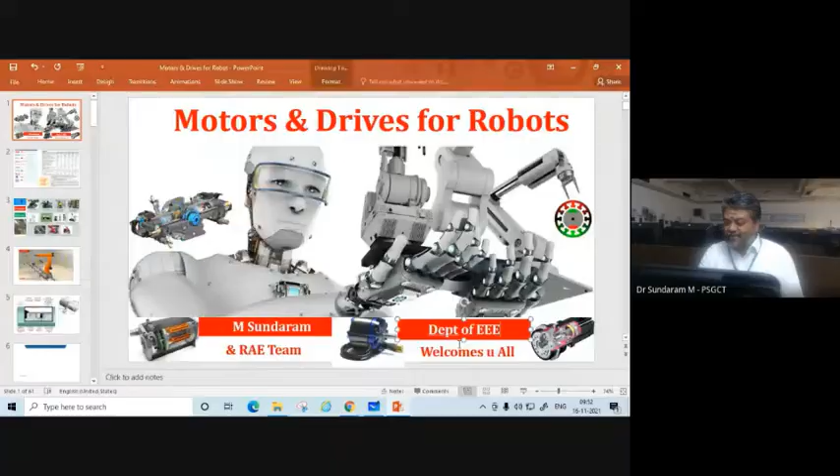Back to presentation. Here you can see, I want to show some integrated motors in the beginning itself. You can see your motor is rotating, but your action is to and fro. There are some automation systems where people are doing this kind of actions.

And some more planetary gear mechanism, harmonic drives, which is heart of robots nowadays. It will look like this, where you can see the motor shaft is attached to the center part. Then on the outside, there are more gears through which a load is going to connect. So you can call this geared motors, but apart from that, it is called harmonic gears.

Why is it harmonics? As an electrical engineer, you are aware harmonics means a mixture of more things with a fundamental 50 Hz. Similarly, the center shaft, with that, you have more number of gears. That's why it is called planetary or harmonic drives. Those things we will discuss, right?

So when you want to start to understand something before delivering to the student, first you find out the top 10 companies in the world who is making that particular content. In our case, this motor. So the top 10 manufacturers in motors are ABB, Yaskawa, Kuka, Kawasaki, Epson, like this.

Why should we go to that? Because what we are teaching should be lined up with the industry where our graduates are going to look. Then only the bridge between industry and academia will be very close. That's the reason, right? So it is basically a learn-how-to-learn concept.

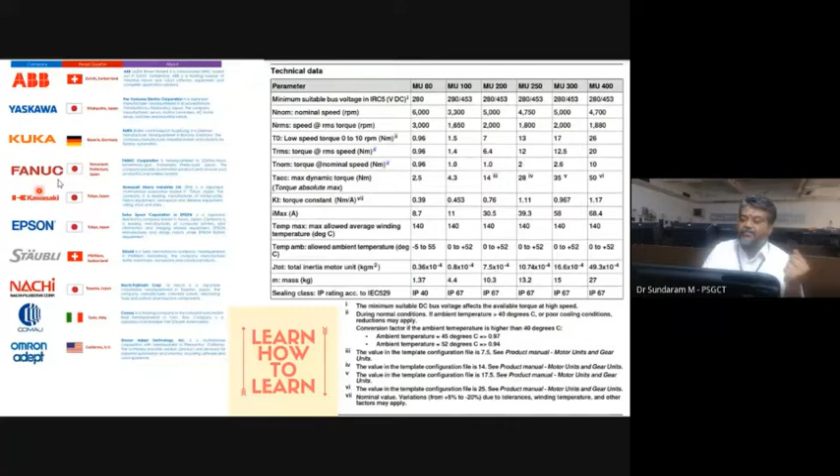Similarly, some class, IP class, all those things, right? So you can go through some kind of datasheet so that you can see some things. So here you can see, right?

See, all the motors in all applications serve only two purposes. One is called position, another is called velocity. So which we have to learn from nature.

See that tiny hair, how it catches that meat. Very interestingly, how it positions itself. You can imagine which control system acts this. PID control, PWM control, space vector PWM, right? Encoder, all those things. So basically it is for position and velocity.

So if you see the applications in robots, it starts from medical mobility, all-terrain mobility, AGVs, then you have AMR, autonomous mobile robots, coming up in a big way. Then industrial robots, robot mowers, agriculture robots, coming in another big way of potential. Surgical robots is another thing. I will share some of our experience with this.

Then inspection robots, then we know everybody talking about EV, definitely it will be a bandwidth for a maximum of 20 years. After that, biofuel will come, because ethanol is going to be a biofuel. So definitely in two decades, because Brazil is the one country having 90% ethanol as fuel, right?

So we should move towards that. That's why the central government is pushing ethanol mixing. Lot of work is going on, but unfortunately because of media and politics, we are not able to look into that or hear into that. See, you should visit some websites to understand why we should understand that, right?

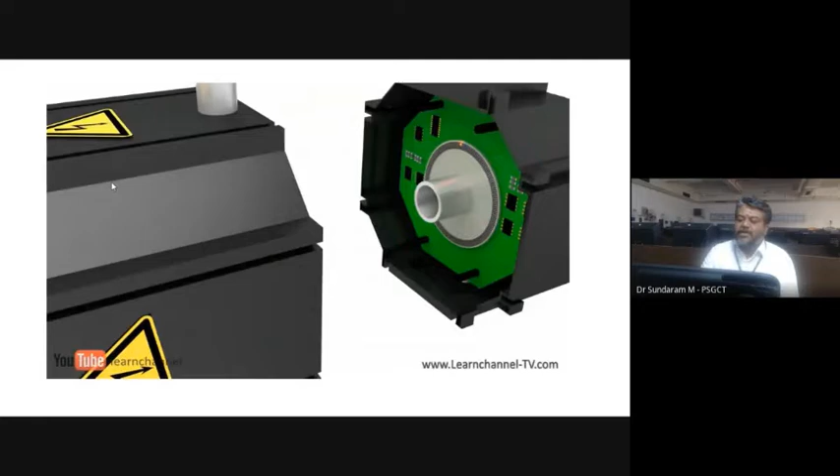So you take a basic servo motor. In a servo motor, you have an encoder on the back side. You can see the encoder is revolving. And if you look, a three-phase supply is connected through your CNC system. The encoder is also fed back to your drive. And this is how the machine rotates, the servo motor control system.

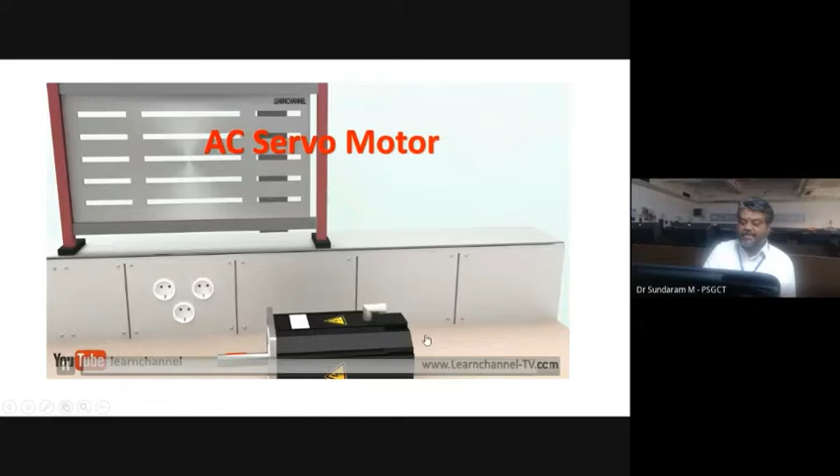Right? So it is basically a PMSM, permanent magnet synchronous motor. So this machine is going to give feedback to the controller. Accordingly, the controller will generate the control signals and it's going to operate like this.

So here you can notice how in a CNC lathe acceleration and deceleration matters. How fast your machines get accelerated and decelerated, how fast it's changing the direction. That's why I said you have to calculate inertia and all other things. Right? So this is another application.

So maybe all this positioning we are basically doing with your PID controller, but more than that, you can see the linear motors with a resolution of nanometers. You imagine what nanometer resolution is going to be. So here the linear motors are moving with this kind of mechanism.

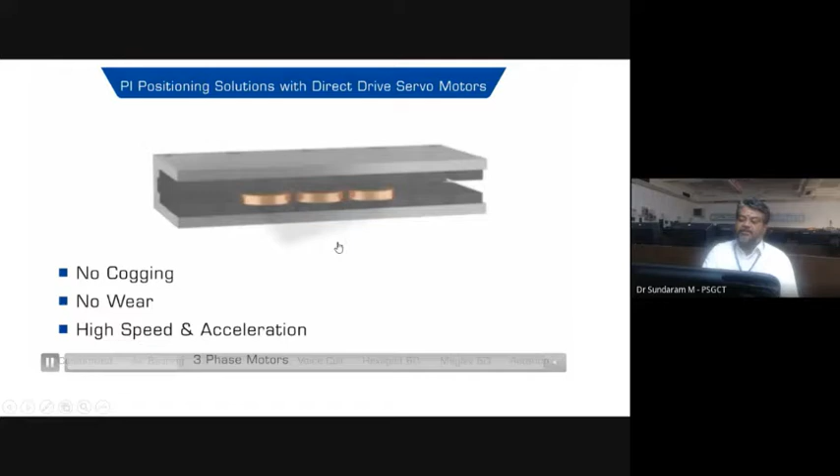So you have a stator on both the top and bottom. Then you have a rotating rotor or moving secondary. Here the secondary is moving, the primary is excited. So a lot of linear mechanisms are used. Here the travel distance itself is 20 mm, right?

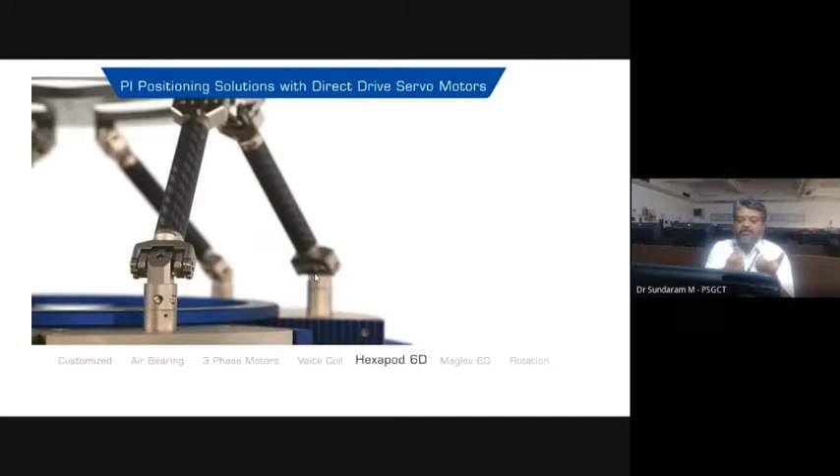But a lot of vibration mechanisms people are using in automation. When you want to position the washer, sample, screws, all those things, they will do this. This is another hexapod with a 200 Hz frequency of vibration, 250 nanometer. This is another automated application, where you can see non-contact movement.

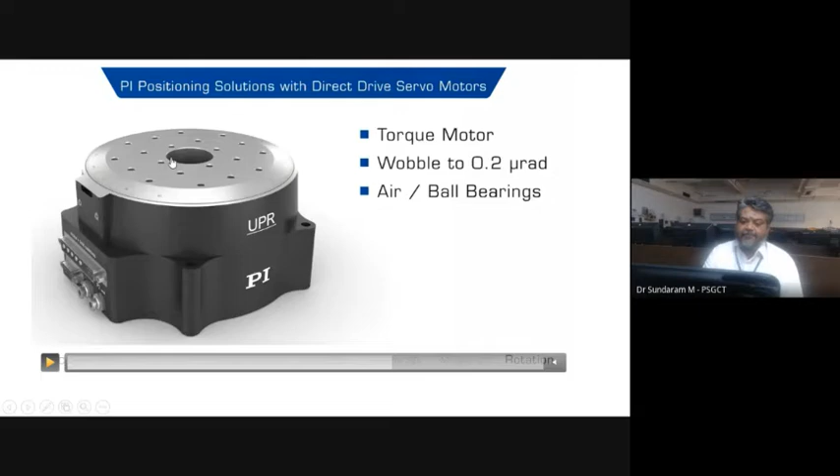And this is another rotating table, which is called a torque motor. Here you cannot see it as a motor itself, right? It is called direct drive. So there is no belt, no gearbox. The moving member itself is going to act as a rotor. That is most important. Right?

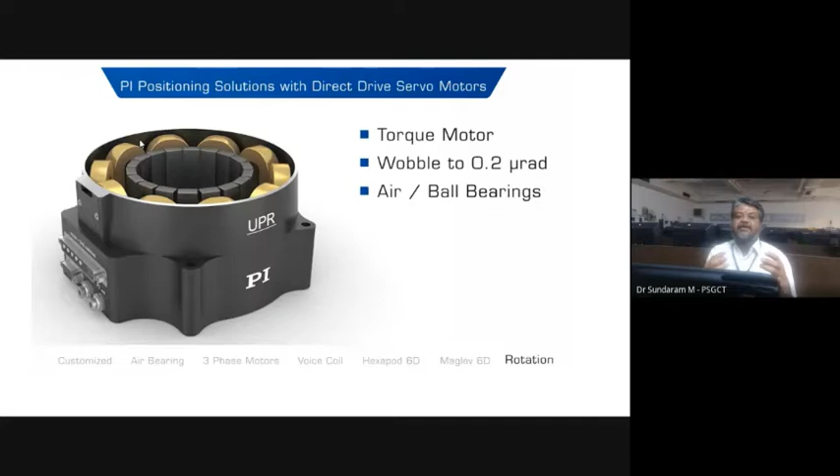These are a few applications, but inside, if you see, it is a coil with a permanent magnet rotor. So everywhere we are going to use either Lorentz force or reluctance force. So how to create Lorentz force or reluctance force? Basically, we need a coil and a magnetic part, or you can say an electric circuit and a magnetic circuit. When a current carrying conductor is kept in a magnetic field, it will experience a force.

If I give that and you keep it in your mind, then you can understand from the data. See, tangential force, radial force, axial force, everything will be determined by the dimensions of your shaft, either diameter or center distance, or how much distance with respect to your core, that means your center part, or from the shaft height, all these things, right?

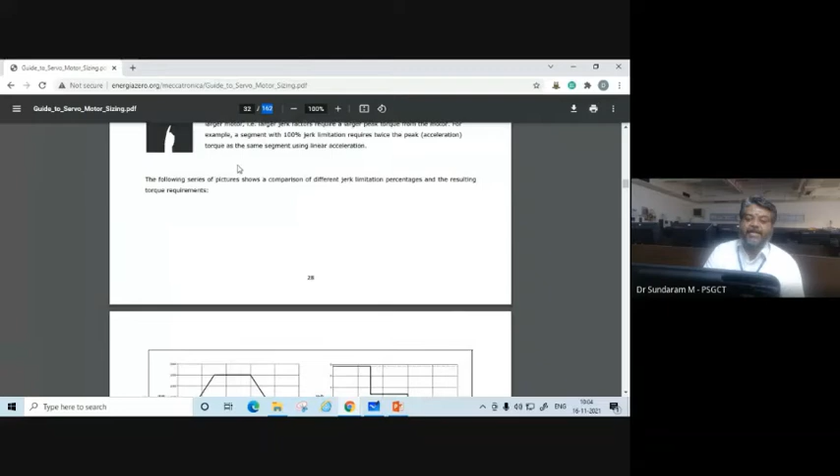And suppose you use the Oriental Motor sizing tool. People in industry mostly use this online tool, right? With an online tool you cannot understand what is what, but it will give applications like this. Say, ball screw load. Your application may be of this nature, or it may be an AGV like this, where you want to develop a motor for an AGV. I will take this example because it is closely related to your program right now. So it is AGV. See, they will give what is what.

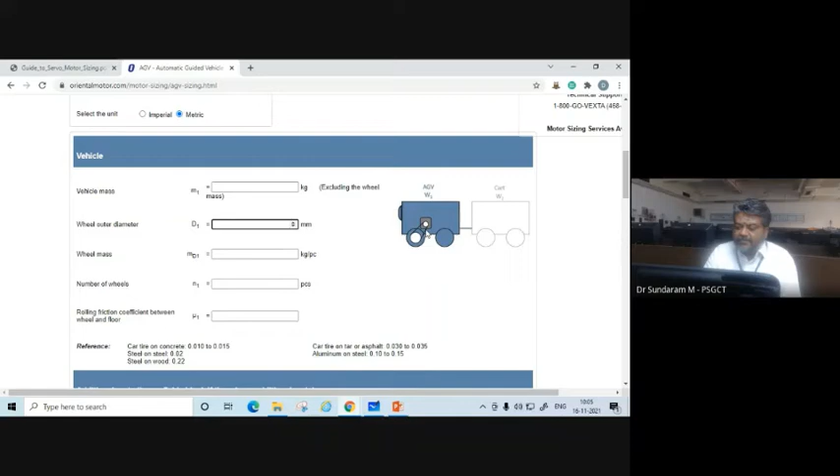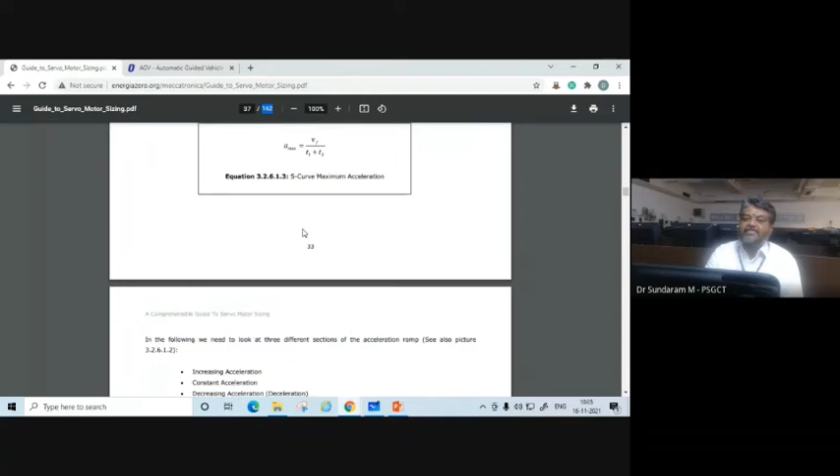Then you have to select either metric or imperial. Now you should put what the weight is. Suppose I change to metric, then it will be changed to kg. Then the outer diameter of the wheel, mass, number of wheels, rolling friction. You have to fill in all these data. Then if you click calculate, it will give the load torque with acceleration, deceleration, so the motor torque. Those formulas, that software, is developed basically from this selection guide. So please go through it. It gives the detailed calculation about acceleration, deceleration, mass, how to calculate the inertia for different profiles.

I want to show one more thing. Maybe some of you have seen it. Those who have seen it, please ignore it because you may get bored. But I want to start with all those things. I don't want to miss anything

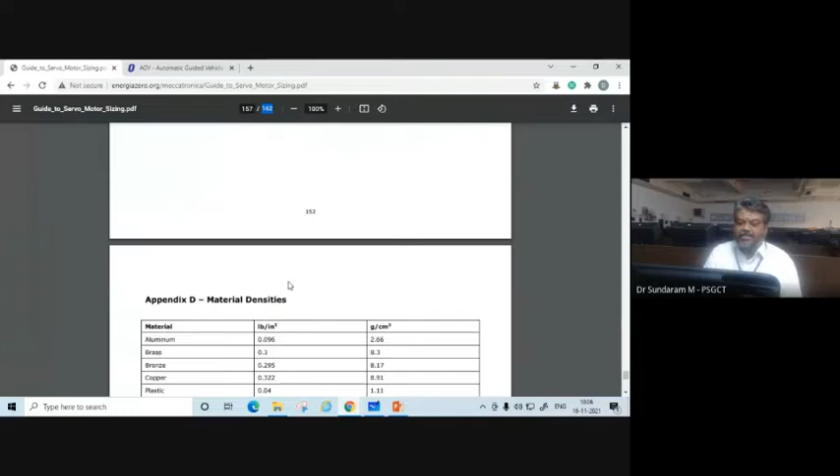for freshers. If you see the index, they have even given some material properties. If you take aluminum, what is the density of the material, in the appendix. And if you connect a screw, ball screw, what is the efficiency? All the details are given. What is the friction coefficient when you use brass on steel, plastic on steel, ball bushing bearing, linear bearing, all the information is given here. So it is a Bible. You should definitely go through it.

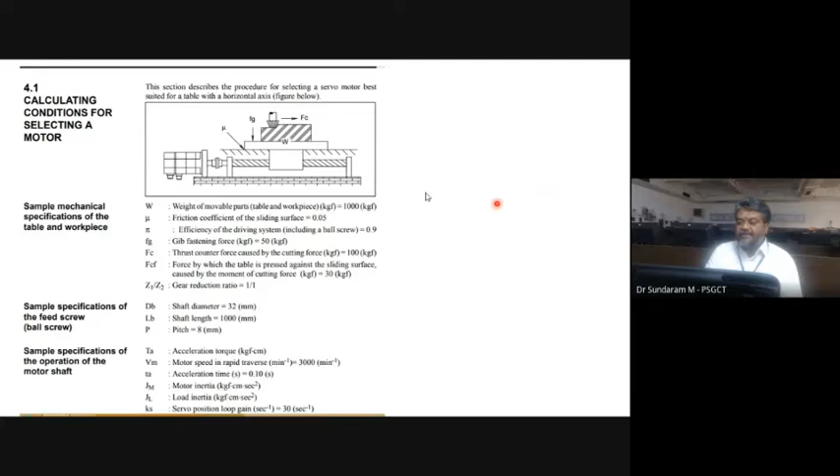If you come back to this presentation, you can notice: if you take a lathe, here the parameter mu is given. So how to know mu? You have to look at the data sheet, right? What would the friction be? In this example, weight is given, friction coefficient is given, efficiency of the driving system, which I have shown in the appendix, ball screw or belt or gear, whatever it is, then the equivalent efficiency. It is a data sheet.

Like the mechanical design data handbook, we should have an electrical design handbook like this. Somebody interested in writing a book can try. So it is about this. All the details are given. I don't want to read those things, but you can do the calculation.

Why I am showing this is, if you want to select a motor for any robot or lathe or crane or elevator, AGV, electric vehicle, first you should calculate the load torque. To calculate the load torque, you should know the system. In the system, you understand what mechanical objects are being used, starting from friction or any gearbox, overall efficiency of the individual system, mass, inertia, everything. So this is step number 1.

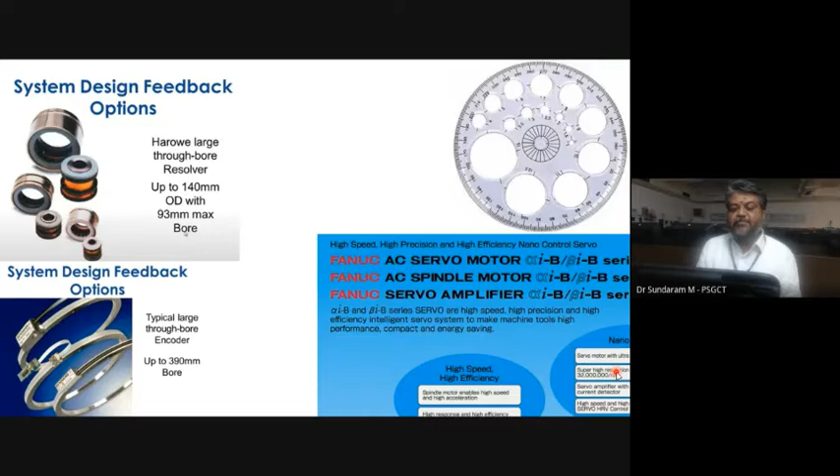Then we have to choose a feedback mechanism in robots and automation. You can notice here, for system feedback people are giving a resolver. We know encoder, rotary encoder, absolute encoder, but one more is called a resolver. If you take a Fanuc servo motor used in CNC machines, you can see high resolution, meaning how many pulses are produced per revolution. Can anyone read this and tell? It is 10, 100, 1000, 10,000, lakh, and 32 lakh pulses per revolution. Imagine how to produce that many pulses in one revolution.

These 32 lakh pulses per revolution are going to connect to the high speed input of the DSP processor. That's why in a DSP processor you have two inputs. One is normal digital input, which can buffer the data at normal frequency. The other is high speed input, where data appears at a faster rate. If you convert these 32 lakh pulses per minute, you can divide by 60, right?

Then you will get clocks per second, nothing but frequency. So it will be in megahertz. At a megahertz scan rate, the pulses being observed from the encoder into your processor thereby control the positioning. That's why in robot or nanometer positioning, you imagine, right? You know 1 mm. That's why I'm showing this protractor.

See, on a protractor, 1 degree you can mark. If you're asked to put 0.00001 degree, can you mark it? It's very tough, I hope you all will agree. So 1 degree, 360 markings. But if you're going for 32 lakh markings in 360 degrees, imagine how very close they are, but it should be detected by your sensor. That's another most important one.

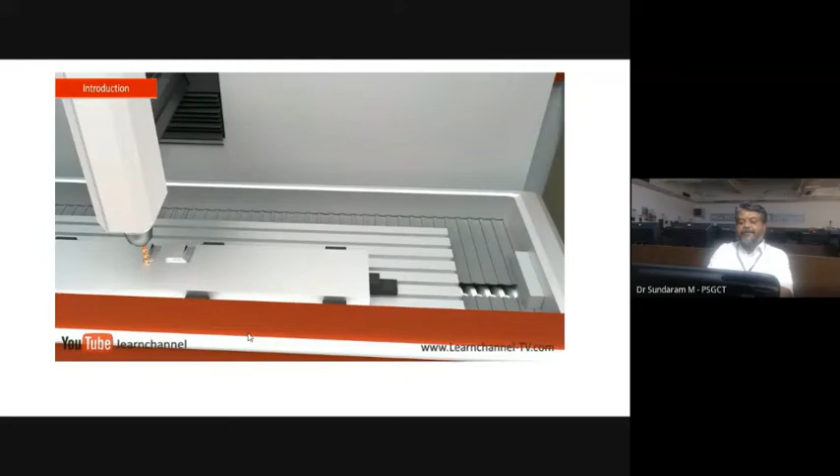So this is another one where you are... so why do we need micron positioning? You can see nowadays machines are used for manufacturing, not only for drilling, also to shape the rocket. So the resolver is placed here. So how does the resolver work? The resolver is basically an electromechanical device.

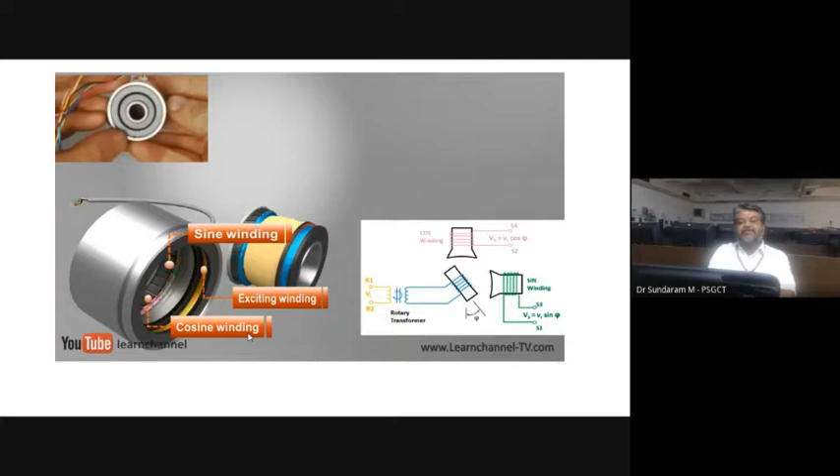It has a stator input and two small windings inside, one is the sine winding, another is the cos winding. And when you rotate the shaft, both windings generate sine and cos waveforms. Once the sine and cos waveforms are given to your ADC, inside the ADC you can divide the sine waveform by your clock. You know clocks are in gigahertz in our DSP processor, right? So using the DSP processor, the clock is used to divide the sinusoidal EMF generated by this.

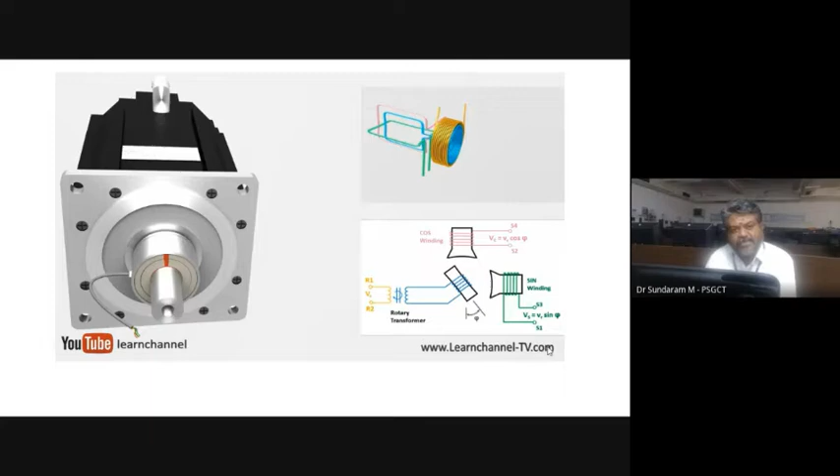See why people go with this advantage: making an encoder disk, what we have seen earlier, is very tough. You cannot put grating, right?

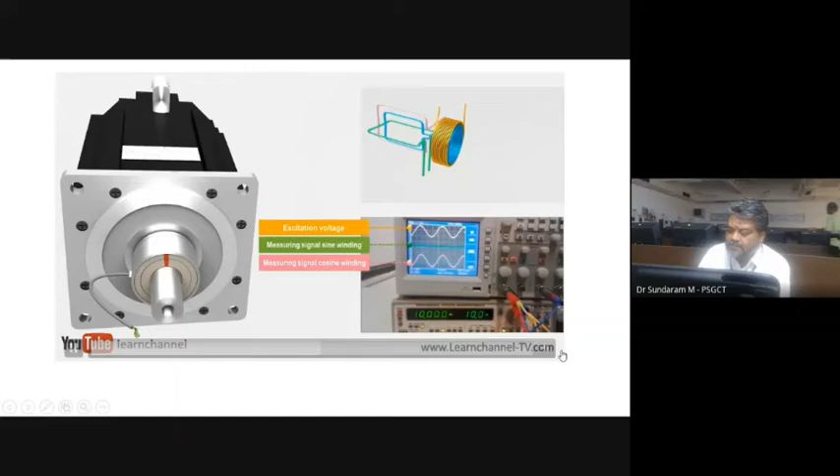So that was mentioned in this. Here you can see. When the RPM increases, the frequency of the signal also increases. It's now running at around 2200 RPM. One winding is excited and two windings have induced voltage. So a high frequency rotating transformer is used. Going with this kind of device, the price is very high.

Right. So now let us understand where motors and drives are used in robots. Application. So far, quickly we came out with the top 10 manufacturers. You should know about the data sheet, what technical parameters they use, where it is being used. To size a motor, you should understand the field requirement: weight of the object, the degree, the transmission mechanism, what kind of gear, what kind of belt and its efficiency. Then feedback mechanism, mostly resolver is used here. Then where it's being used.

If you take your robot, vertical motion, what do you mean by vertical motion? Moving up and down. Why should I understand roll motion, pitch motion, vertical motion? Then only you can understand how long this motor is going to operate. What is the duty cycle? Or is this motor going to operate only 5 minutes in a day? Pitch motion is short duty. But vertical, radial and rotation motion share equally. Yaw, pitch, all those operate then and there.

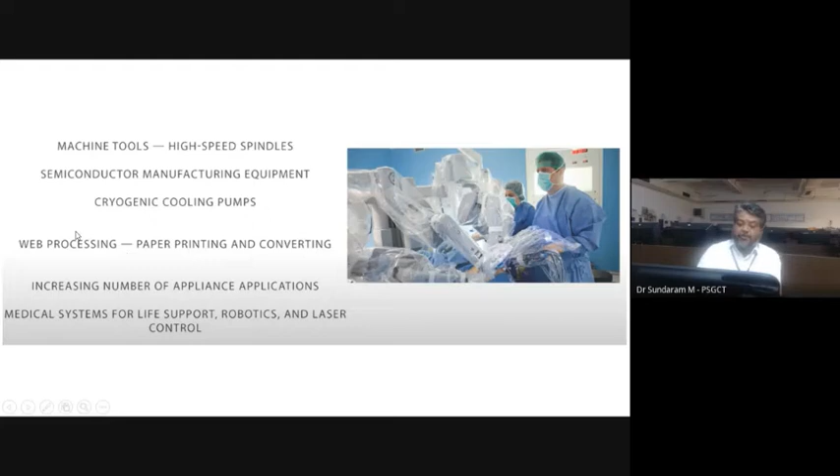So again, the same application. I think already we discussed why we need a direct drive. Since the belt occupies space and needs transmission efficiency, we want to overcome all those things. So here you can see high-speed spindles are used in machine tools, semiconductor manufacturing equipment, cryogenic cooling pumps used in satellites, and even paper printing and converting in web processing. Several applications like medical systems, robots, everywhere we want to use this.

And if you see the motor being used, it's not the conventional mechanical motors. More than that, we need. Even in electric vehicles, people are using this. So different variety of motors. Here you can see all the motors used in robots and industrial applications. Some of them are direct drive, some of them are coupled drive. Now you can see one of the high density motors used in robots. This is the permanent magnet in the rotor. It's basically a servo motor, or you can call it a PMSM motor.

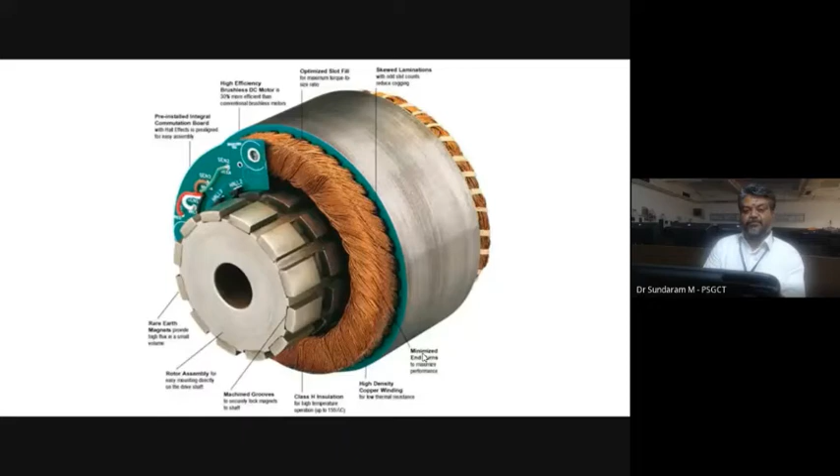But you see how the windings are wound using a machine to reduce the end connection. So compact, winding by hand is not at all possible. You can notice here the end turn is reduced drastically. The end turns on both sides of the stator core contribute nearly 20% of the resistance, 20% resistance which is not required. The conductor lying in the overhang portion doesn't contribute anything. The conductor lying in the core is going to experience the force. So we have to minimize that. And some sensor-integrated motors.

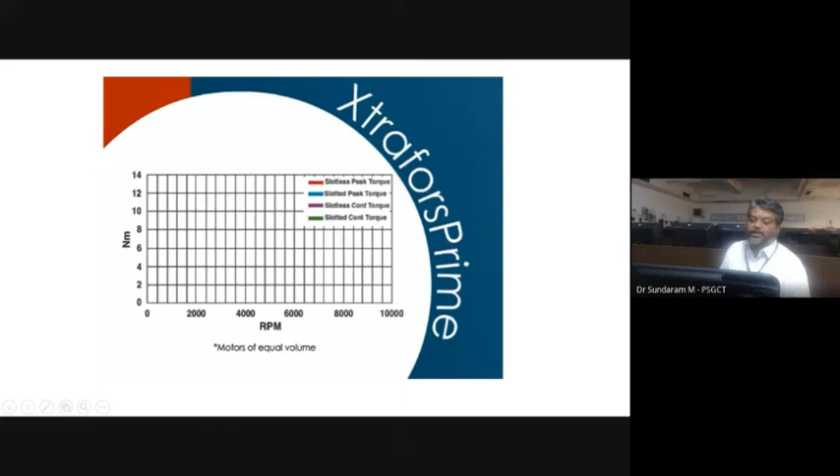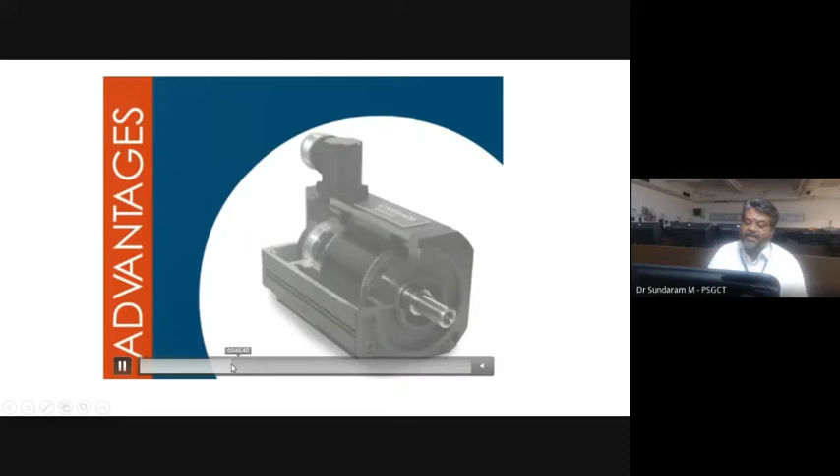It is a brushless servo motor. I just want to show how it is made, and a characteristic, to understand it. One axis is Newton meter and another is RPM. You can notice here, the red line indicates slotless peak torque. Blue indicates the slotted machine. The brinjal color is slotless continuous torque. And green is slotted machine continuous torque. So you can notice the slotless motor has the advantage; see how many times more it is.

See here. Why? We are not moving into slotless right now, but all the motor manufacturing companies abroad, particularly those who are making motors for robots, are going with slotless machines with the material. Now 3D printing is coming up. So if we are not catching up with the technology, we will be very much behind. So now you can have a look at that slotless machine.

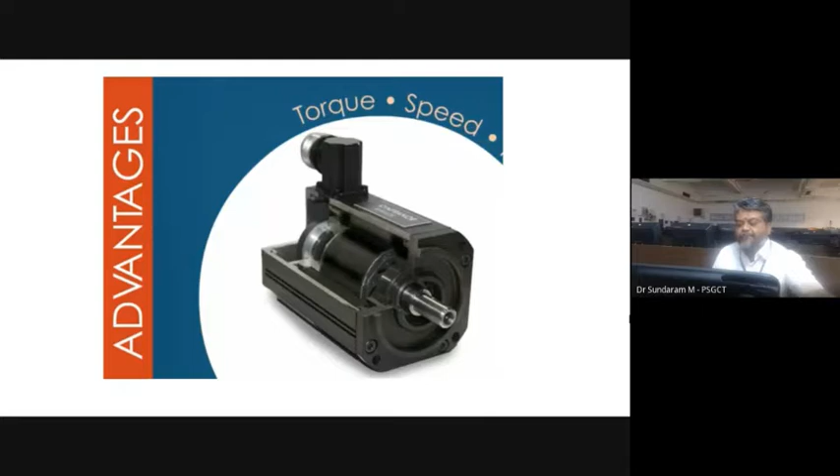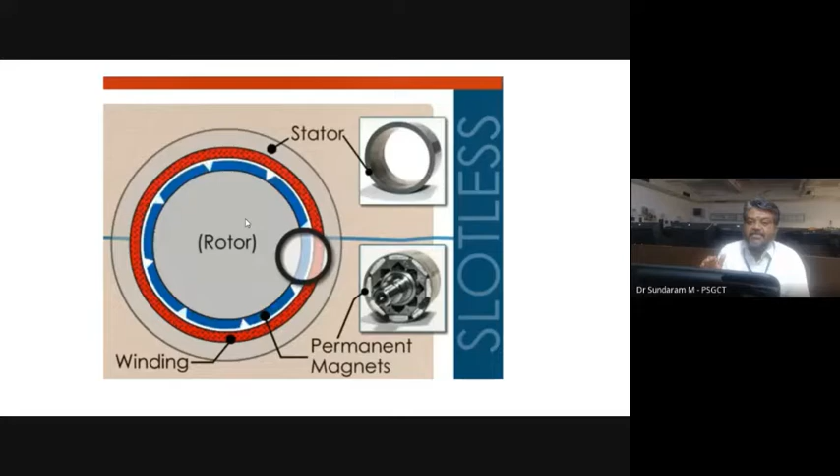Now you have a look here. It is a stator, there is no slot. Winding is placed inside, smooth cylindrical surface. So when you use this machine, then you will find less torque ripple. Because of the less torque ripple, you are getting good RMS torque, noiseless operation, vibrationless operation. So many advantages in this.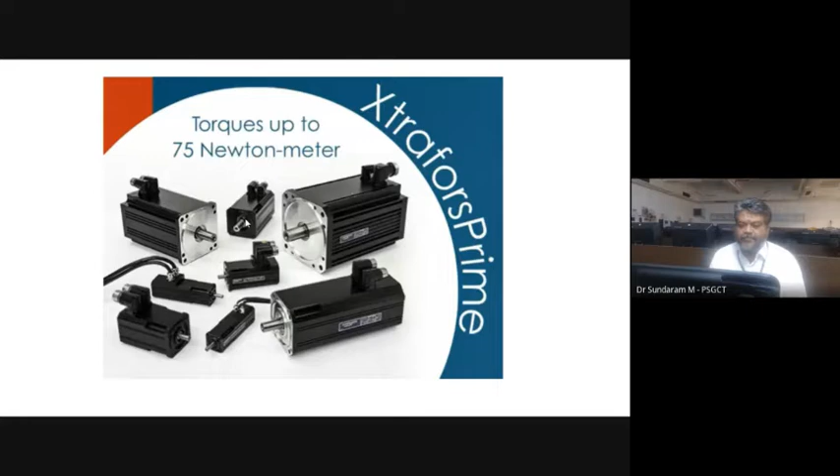So we should include all those things. Like, this is the company who is making this kind of motor. Frame size very strong, 38 to 190 mm. Most of the robot motors are smaller in size, but torque you can see 75 Nm. So in most of the assemblies, fabrication, metering technology, everywhere people are using this motor.

So now you can see, I just shortlisted the application. This is called Universal Robots. In Universal Robots, you cannot see the motor anywhere. It looks like a joint, that's all. But inside the joint, they are going to have a motor. So you cannot see the motor. That is the beauty in this. Motor is kept inside, but you cannot see it.

There is no space for placing a motor separately and connecting it through a gearbox, belt, or chain, whatever the transfer mechanism. There is no that. In a frameless motor, you can see this is your normal rotating magnet inside, stationary wound armature. So it looks like a concealed winding.

We know that in all the motors, the D squared L rule is used for the output coefficient, C0 D squared L. So diameter and length decide. But here, they are increasing both length and diameter because of the provision of frameless. So you can see the factors to be considered. For a low speed, high torque machine, choose a larger diameter. For a high speed machine, go for a lesser diameter.

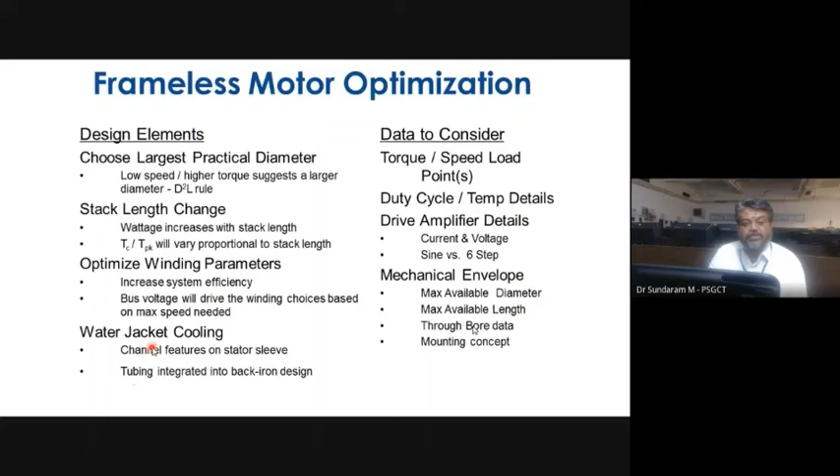Then if you increase the stack length, you will get a machine with a lesser diameter. Lesser diameter means πD is less. Peripheral velocity is going to be less. Centrifugal force is going to be less. So you can make your motor with less costly material. That is another advantage of going for less diameter and more length. And sometimes you are in a position to give cooling. All those things you can see.

This is another thing. Here you can see in robot motors, even the bearing is part of your shaft. If you want to dismantle, you cannot rewind all this; use and throw. That's why it is costly. The purpose I want to show is the closeness.

See here, the groove and the gap between this, you can see the gap per side, 0.1 mm or 0.05 mm. Imagine. Now we are making motors with an air gap of 0.5 mm. If we go to the Sahani group, they'll give an air gap of 0.5 mm, 0.6 mm. But you see the air gap here, 0.1 mm. Very, very thin. It means how close your rotor and stator are, and what the dynamic balancing capacity should be; only then will it be possible.

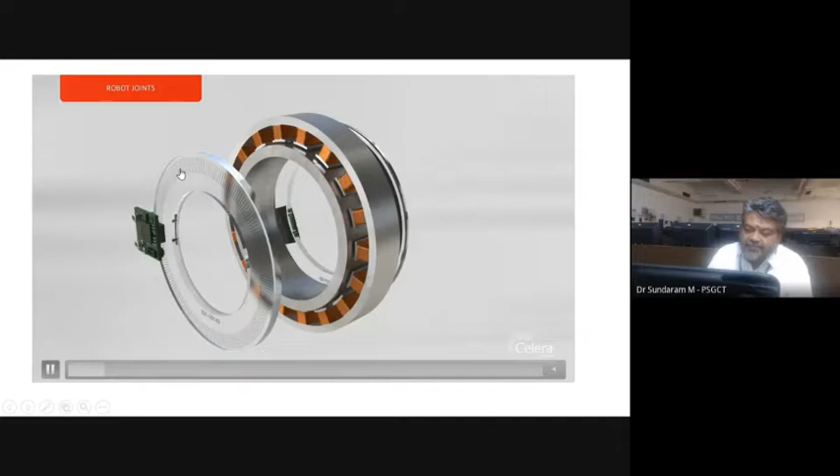And have a look at this. This is another company who is making robot joints. You can look into the winding, and this is an encoder disc for some motors. You can see small lines. It is a joint, that's all. It's a robot joint, which is called an integrated motor.

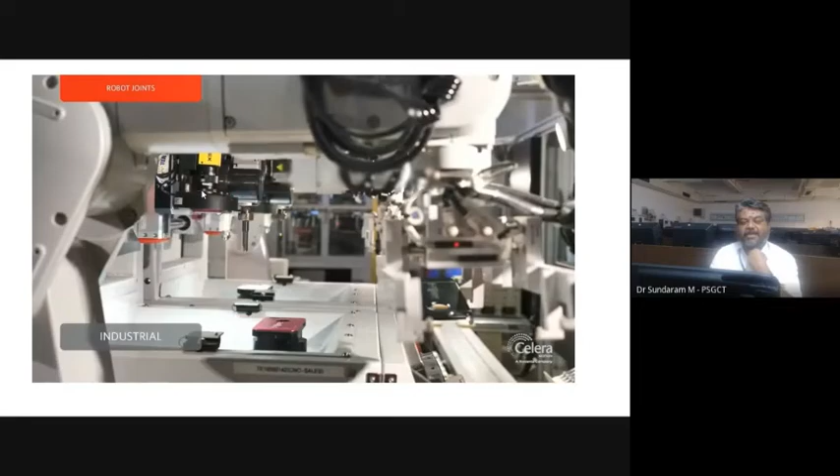Direct drive, integrated motor. But keep one thing in your mind: all are working with Lorentz force and reluctance force, which we talk about for conventional DC motors and induction motors. A current carrying conductor kept in a magnetic field will experience a force, or the rotor tends to align along the minimum reluctance point.

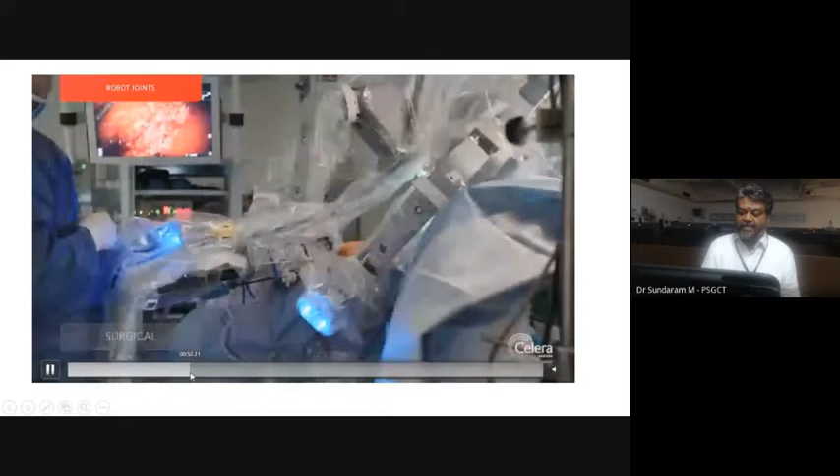See, this is a surgical robot, a doctor operating from the master console, and the robot is going to move. We did this project, the Endotrainer project, DST funded. We bought motors from the Maxon company, Maxon.

150 watts, 1,25,000. Imagine a 150 watt motor costing 1,25,000. What technology can we do here?

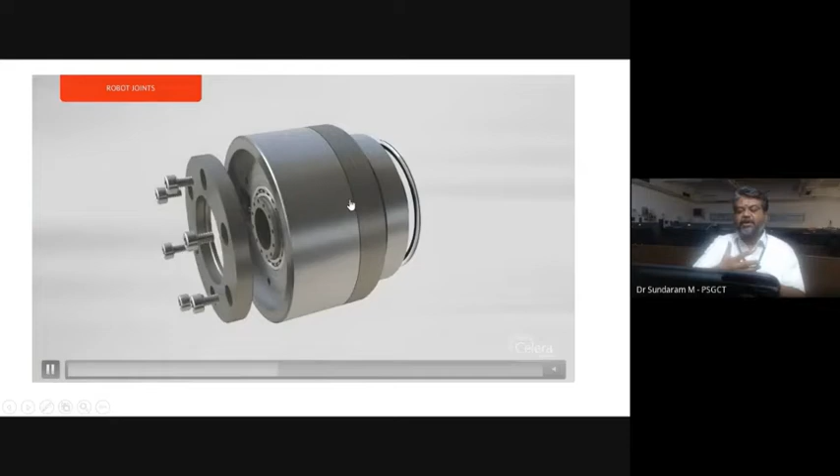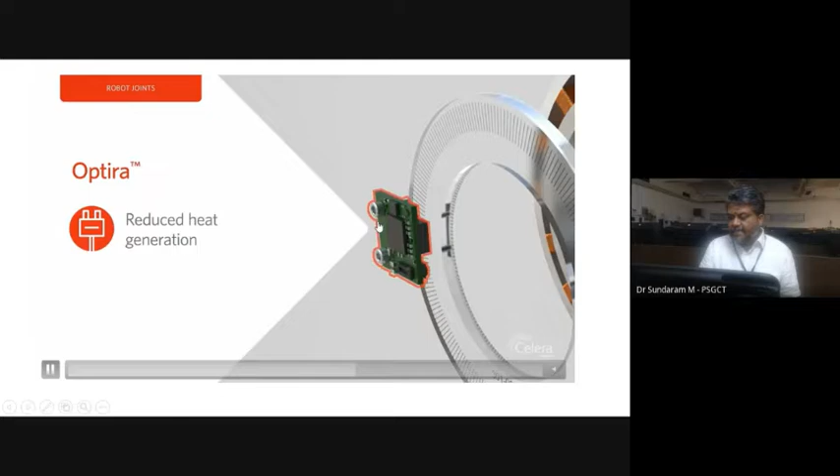See here, the motor winding, concentric winding, how very close and neatly arranged, and the magnet is segmented magnets with the encoder, everything fixed inside. There is an outer joint. It's completely enclosed, now you cannot see whether it is a motor or not, but it is rotating. The rotating rotor itself has a link for the robot, so that's why it is called a compact machine. This is a robot joint, and you can see the integrated chip for decoding and encoding.

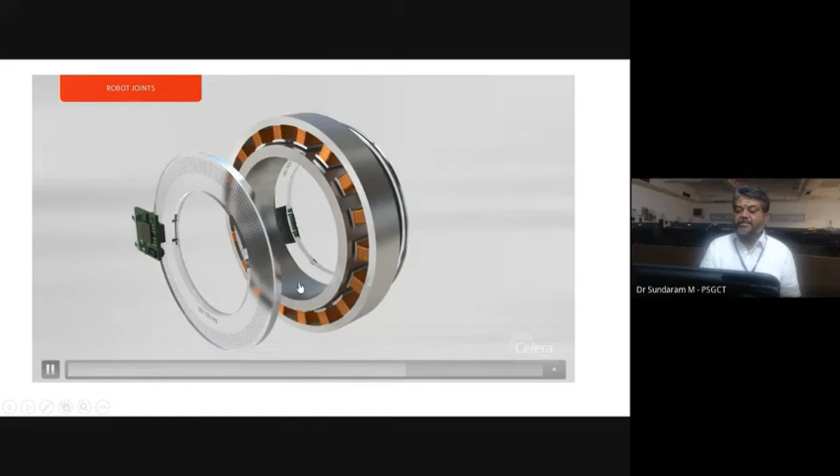5 nanometer resolution, imagine this, with so many tracks. So when light passes through that, your receiver receives the signal, and that signal is converted into pulses. Those pulses are used as feedback. Due to time limitation, I am using this, so quick settling time and high torque have several advantages.

This is what I want to show from Maxon company. You have a Maxon DC motor. Some people call this an electronically commutated motor, which is brushless. Sometimes this is called brushless AC servo. DC motor is okay as nomenclature, but when they made a DC motor with a brushless mechanism, they call it a brushless DC motor.

But brushless DC motor nowadays is called trapezoidal back EMF. If it is a sinusoidal back EMF, people call this servo or brushless AC, or PMSM, permanent magnet synchronous motor, or brushless AC motor, or simply servo motor. All of these come under this category.

It's just to show the speed, you can see 1 lakh RPM here. This machine is capable of running at 1 lakh RPM, imagine. In our induction motor we are limiting to 3000 RPM, but in brushless, 1 lakh commutation is going electronically, so the MOSFETs or IGBTs are switching at high speed. Lower end machines are still using higher end transistors, small like 70 watt, 50 watt machines.

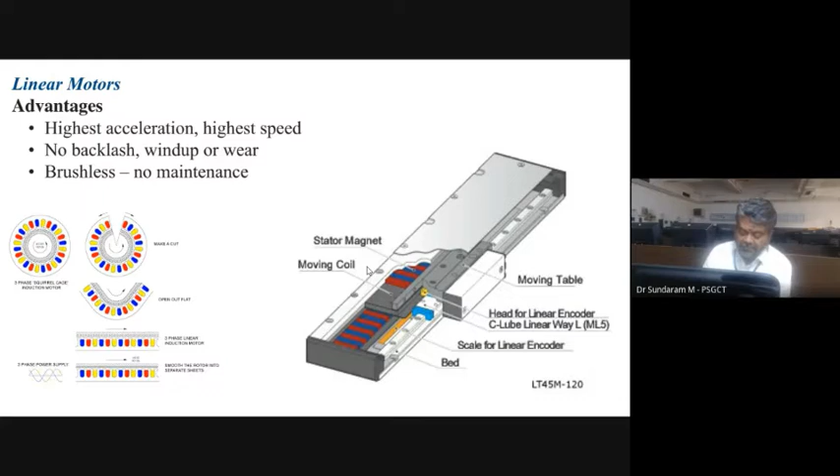And sometimes you will have a gear box like this, so many gears here, a planetary gearbox. Maybe we can show some of the videos later on. This is your micro stepping motors, which are also used in robot and automation applications.

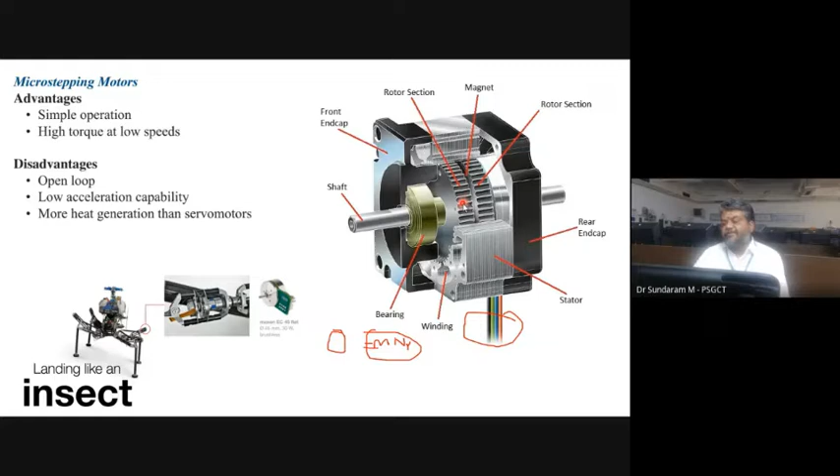The teeth of the first stack is not the same as the top second one. Here you can see, this is your teeth, this teeth is not aligned with this teeth, it goes centered, hope you could accept this. It is centered, so misaligned. This misalignment of rotor teeth is purposefully made for providing sinusoidal output.

Then a small one, about 10 mm, 1 centimeter, and 1 watt. You know this machine's cost, it comes around 20,000 to 30,000. 1 watt, but they are going to fix those motors in the finger gripper.

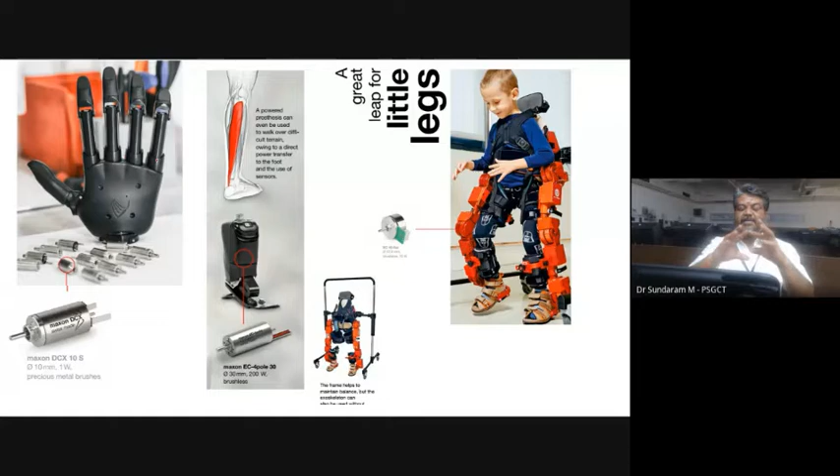See, now you could imagine how our fingers are working, any degree of freedom, right? You can move in any direction, it's not moving in only one way, you can fold it and you can rotate. If you want to understand this position and velocity, you should visit the flower market or in front of a temple or cathedral, so you can see how it's flexible. So they are making this motor, brushless DC motor, as some kind of help for handicap support.

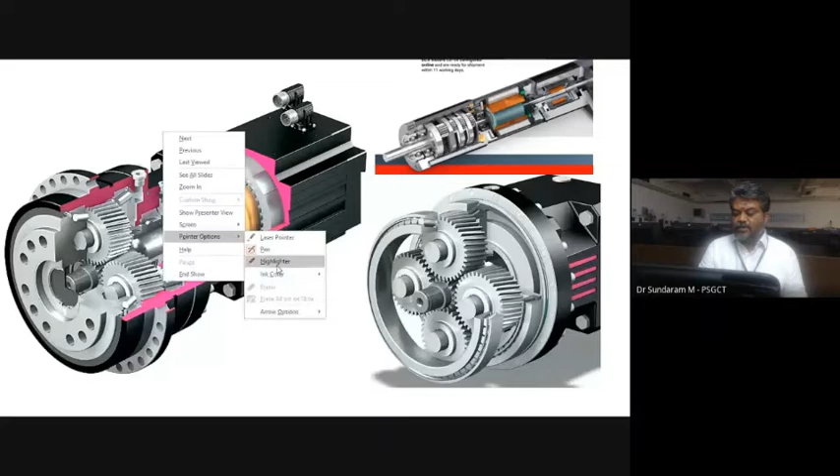You can use lots of arms like this, and this is another electric vehicle frameless machine. These are the speeds that we discussed earlier. Now you must understand this.

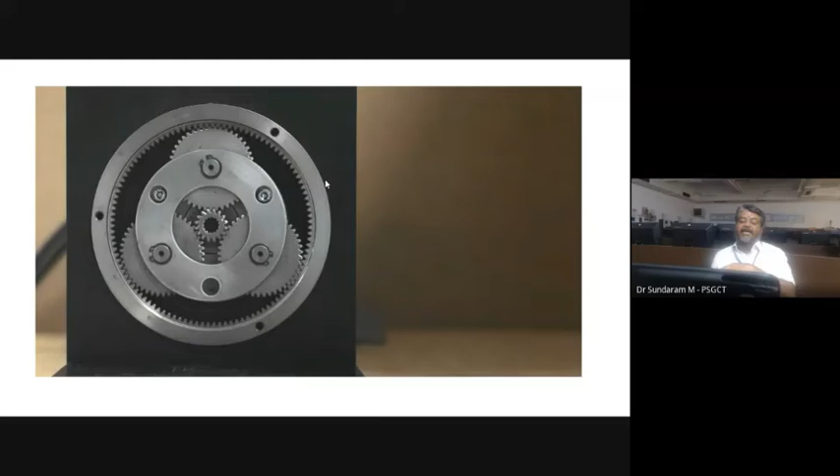Planetary gearbox, let us have a look at this video. This is the center part, what you are seeing is the shaft. Then you have 3 gears, that's why it is called planet, sun on the central planet. The central shaft is connected to your motor rotor, then the remaining parts are outside, but it has a lot of advantages. If you take wheel drive, planetary gearboxes are used in higher end HGVs, you can see.

This is attached here. You can see a cut-section view of the machine in this picture. It is a slotless machine. You can have a look inside.

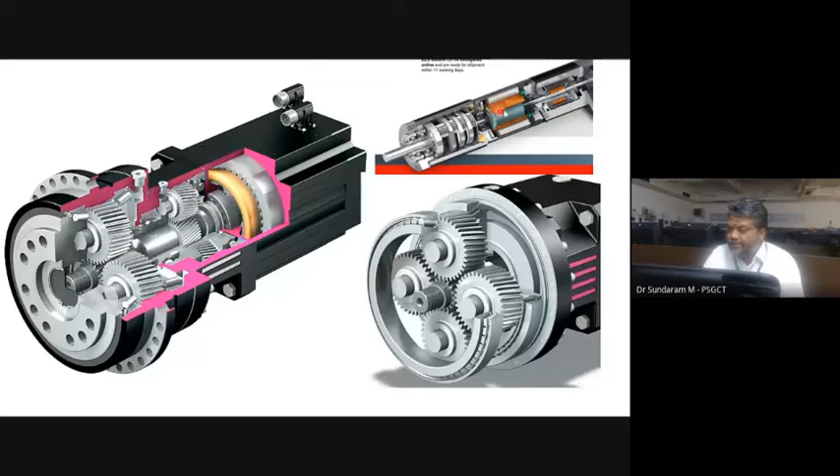There's a point inside your rotor, and here you have a sun gear, planetary gear, or harmonic gearbox. See how this shaft is attached with all the gears, and not only that, this outer part is rotating. That's what you have to look at. This is the actual shaft of your machine. When it rotates, the planetary gear makes the outer portion rotate. So this outer portion is directly coupled to the machine.

So you can go through this. Because of the shaft rotation, the outer part is rotating. This is a spindle motor used in the center part of any CNC machine. So how the outer part is moving, you can have a look at this.

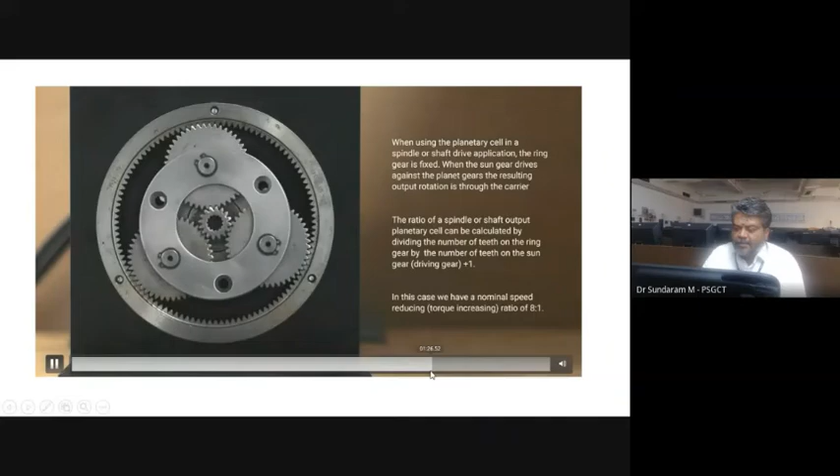This is about planetary gearbox. This is about motor control and all.

The next machine is your stepper motor. This is also another important motor used in robots and automation. Here you can see the pre-wound coils are placed here.

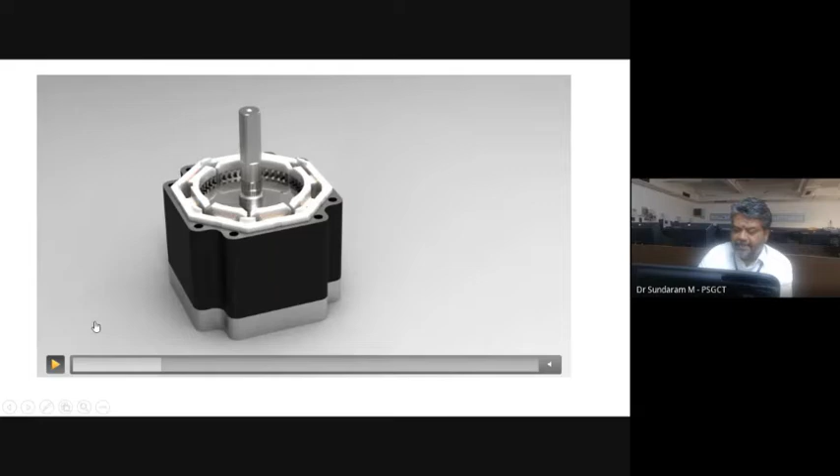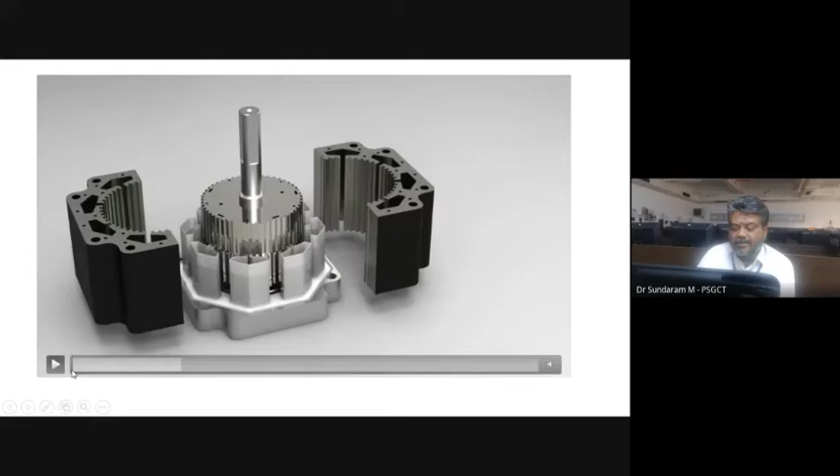Here you can see the stator poles are teethed in structure, and you have a rotor. The rotor is a hybrid rotor. It has a permanent magnet along with the VR, variable reluctance, rotor teeth. And it has more teeth. The number of teeth in the rotor will give the position accuracy.

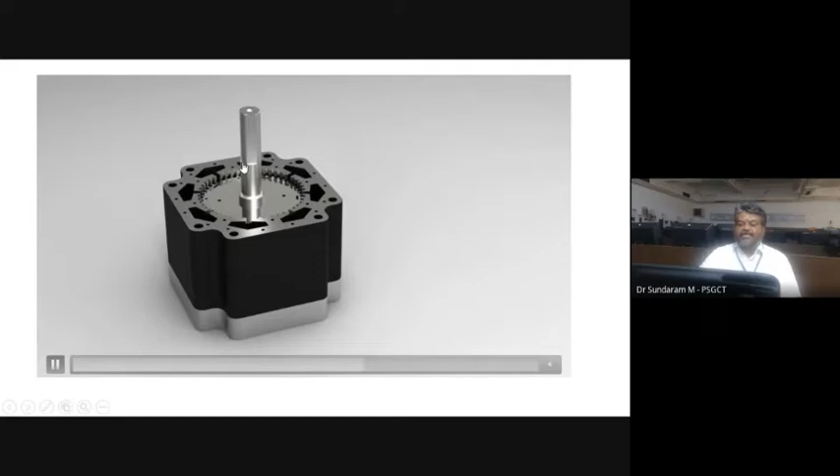And it depends on the excitation you are going to give here. So these diametrically opposite pole faces form a phase. Then you give excitation, so you can change the polarity of current, thereby the polarity of the pole. You can notice here sometimes it is red plus, sometimes minus. So accordingly, the north and south pole will be formed, and the rotor will move either clockwise or anti-clockwise. So this is about your stepper motor.

When you go for sizing, some conversions you have to follow. Conversion of torque, which I have shown already: Newton meter to kg centimeter, meter, ounce inch, lb inch, lb foot. Different companies follow different units, so always you can take this conversion. Also the moment of inertia, you can use this. These are available in data sheets.

When you want to calculate the total torque that should be produced by your machine, you should know about total torque for rotary and linear motion. In linear motion it is called force, but in rotary motion it is called torque. That's the difference. So total peak torque is given by the torque required for acceleration, torque required for friction, torque required for your windage action.

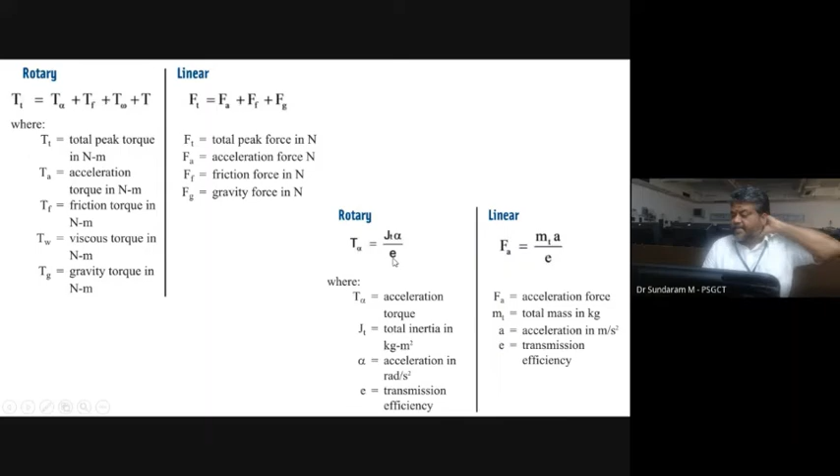Then gravity torque. Gravity torque is torque for a given mass. Suppose you take a lift, when you operate the lift from the top, it is coming down, so the mass acting on it is determined by gravity. Suppose it is rotary, then you can find out acceleration torque using moment of inertia and acceleration time, and also transmission efficiency you can find out. For linear motion, force is given by mass into acceleration.

This efficiency, say suppose I am using a gear, then I am calculating the torque at the output side, so output divided by efficiency will give the input, that's what's connected to your motor. So you have to be very careful in using this formula. And also acceleration, yes, you can calculate using these formulas. I don't want to go into that, but if you go to a comprehensive guide, you will get all the information. I took it from one or two comprehensive application guides.

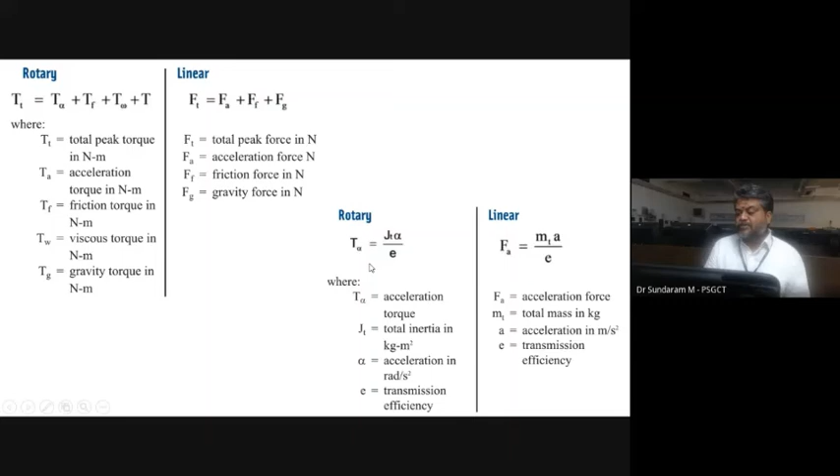Then you have to find out load torque. Earlier what we did, alpha, how much acceleration torque is required, you substitute in this formula. Once you know the moment of inertia, then what mechanism you are implementing, you refer to the annexure of the servo motor guide to understand the efficiency, ball screw, timing belt, whichever of these you are using. So you can take this value of E from the data sheet.

Then alpha, of course, the user will give, I want to get the acceleration from this second to this second. It may be in seconds, or mostly tenths of a second or a single second. Then mass moment of inertia, you have to get it from where? From the manufacturer, that's what I have shown in the beginning slide. So you can get it from there.

Suppose if the moment of inertia is readily given in a different unit, you have to convert that moment of inertia to the required unit. Then once you find alpha, acceleration torque, F frictional torque, W windage torque, you can find out your total torque requirement.

You use RMS torque. This RMS torque is used to accommodate your loading pattern. Earlier I told about continuous torque, intermittent torque, intermittent periodic with jog operation, intermittent periodic with jog and plugging, braking, those kinds of things. Using that you need RMS torque.

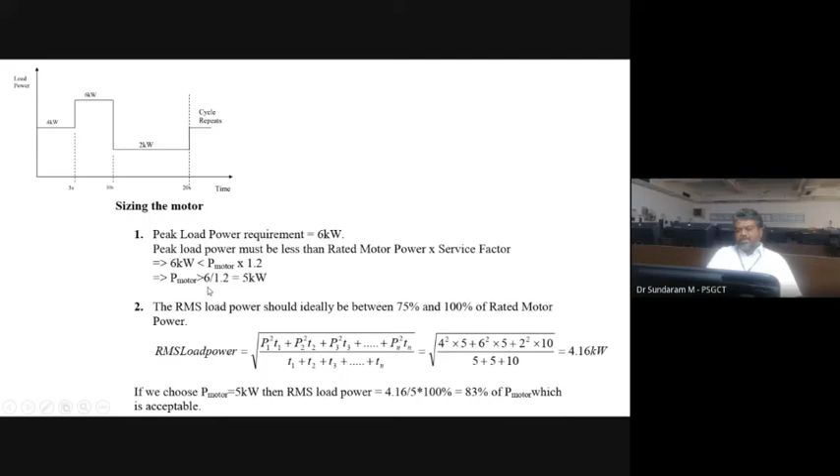I am showing this, not reading everything, but it is available in that servo guide. The same thing is available in the Oriental online motor tool sizing calculator. Due to time constraint, I am using this; I will share the slides.

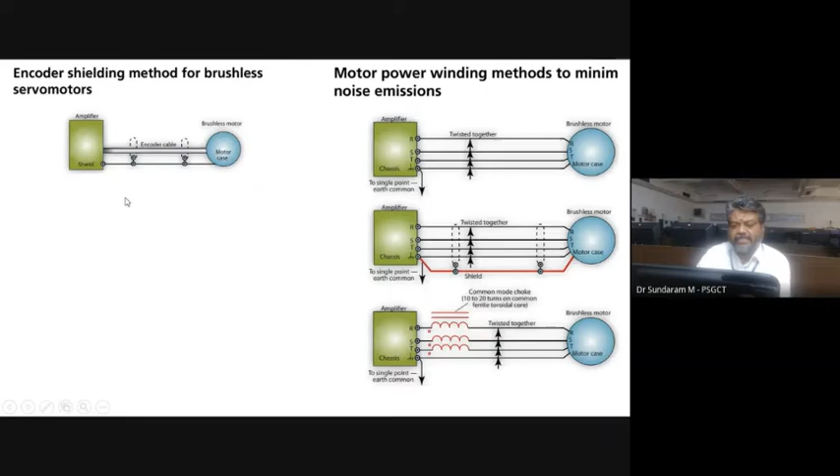The next one: if you use an encoder, then definitely we should use shielding. Shielding is most important — hope you are aware why shielding is used. Suppose you take this cable, your conductor is this one, with external insulation. Suppose I put the conductor inside a copper braid — let this blue color line represent the copper shield.

When a magnetic field comes from outside, this high frequency magnetic flux penetrates through the insulation and cuts the conductor. Whenever there's a change in flux, a high frequency pulse appears, looking like this in the data cable. This high frequency pulse cuts the conductor and an EMF is induced. The conductor already carries a clock pulse or data zeros and ones, so this induced EMF gets superimposed on the signal pulse, and sometimes the pulse may go high or get disturbed in magnitude.

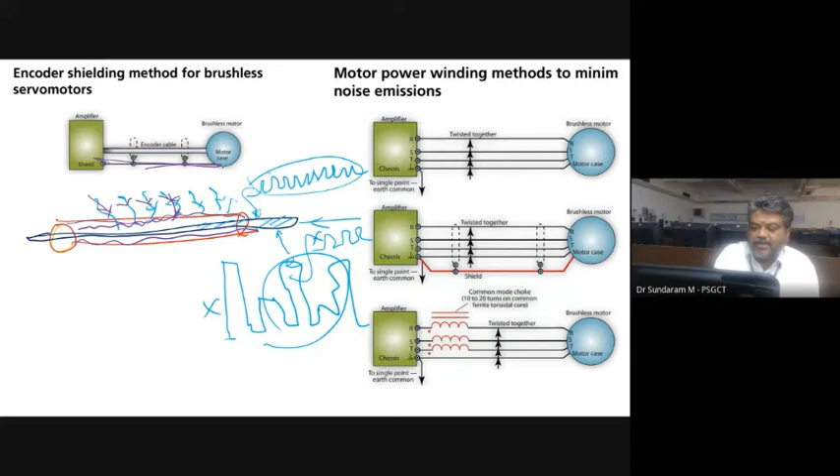So the signal gets damaged — the signals will be filtered. To avoid that, what we provide is a shield inside the insulation. The shield is the copper braided wire. When the flux comes and cuts through, this shield acts as a conductor and induces the EMF instead. The shield is connected, as you can notice here, to the body and then to earth. So the shield acts as a load — whatever flux comes will vanish here itself.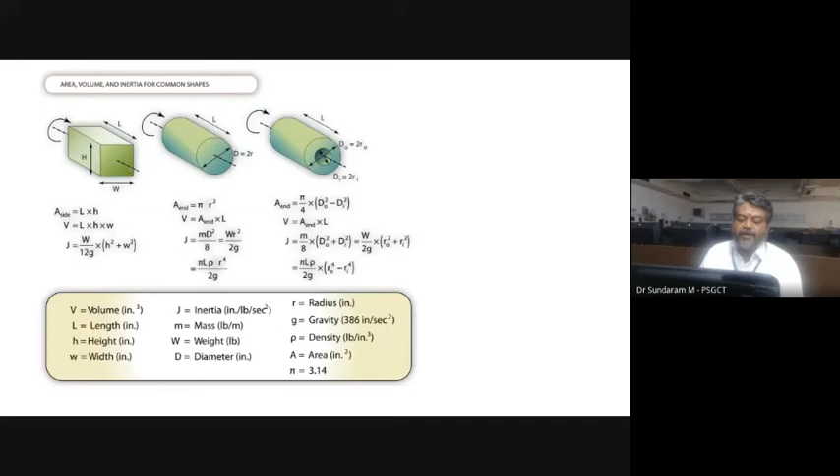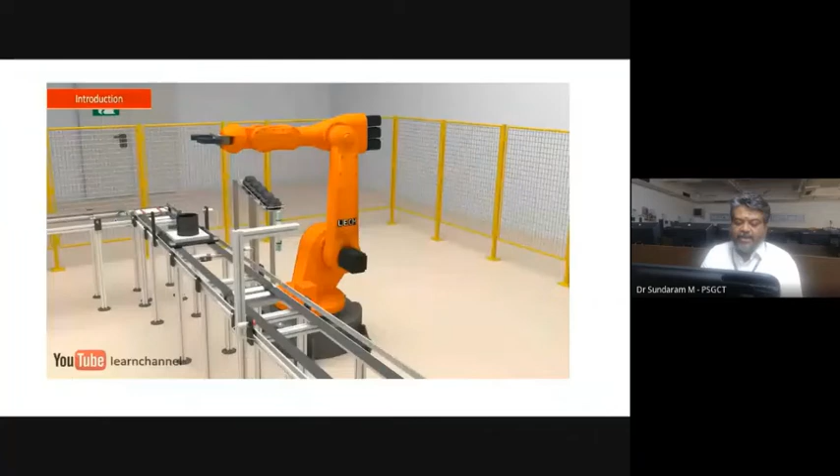So far, quickly to refresh what we discussed, we started with application. Mainly the robot motors are used for position and velocity. First, you should know what are the companies, then some specifications, then application. Each application demands this thing. Mainly it's for position and velocity. Then few videos to understand how fast it accelerates and decelerates.

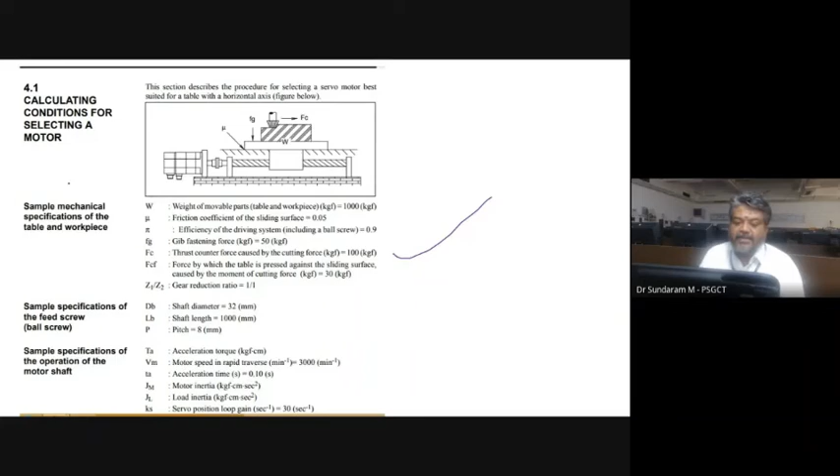Because this acceleration, what you are seeing is T alpha. Right? So we should know about velocity, how fast it should accelerate. That way you can find out T alpha and all those things. So then the machine, some of the extension shaft sizes, mechanical thing, most important. Normally in field, what data will be provided. So using that we have to find out the motor torque.

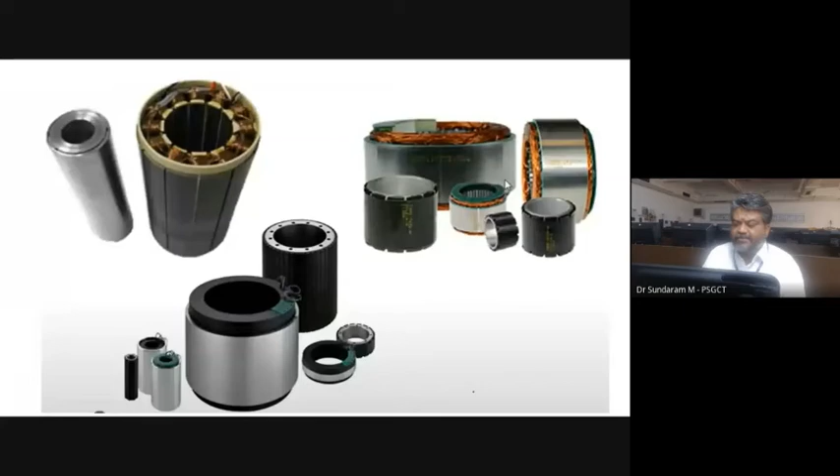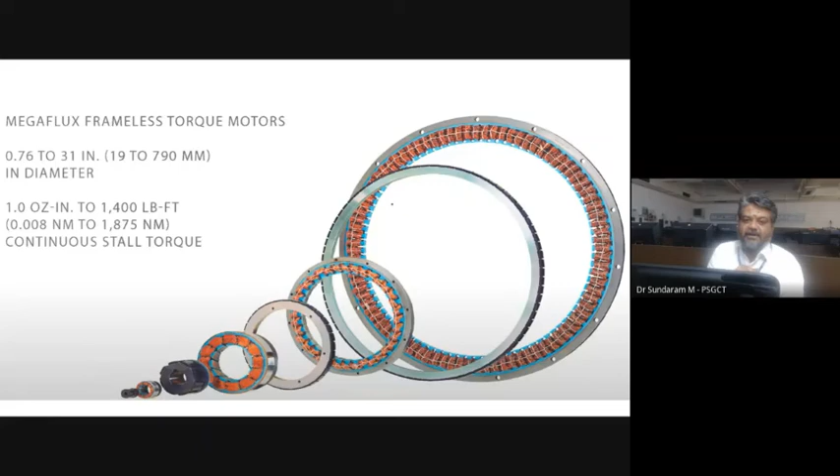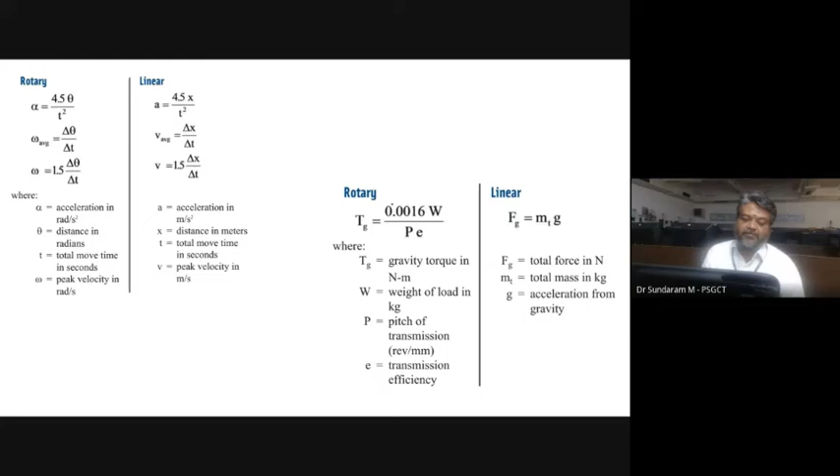Then we went through frameless motor and magnet applications, some of the applications. And yes, these Maxon and all, you should go through and read what is inside. And planetary gearbox, all those applications we have seen. And some conversion table, how to calculate acceleration torque, friction torque, windage torque, all the formulas. I am not going into the formulas. Basically, these formulas are derived in detail from physics, right? Normal stuff. Some examples are given. And while you select, some of the data, what you have to look at.

So then, if you come to the drive part, robots, motor, what are the motors we have seen? And quickly, if you see the drive, basically this motor is connected to load. It may be a robot arm, or it may be an AGV, or a moving platform, or your machine, whatever it is, through some mechanical transmission, ball screw, belt, spur gear, harmonic gear, anything. You need an input. The amplifier is basically your drive. Mostly it is field-oriented control, FOC. Then it is your position controller.

So from the motor, resolver feedback is coming to your processor. It may be a DSP processor or higher-end microprocessor controller. And the ADC converts. That's why I said you have analog sinusoidal, and suppose we have a cosine waveform. Both this sine and cosine are going to be divided by n number, n counter. All the electronics will be inside.

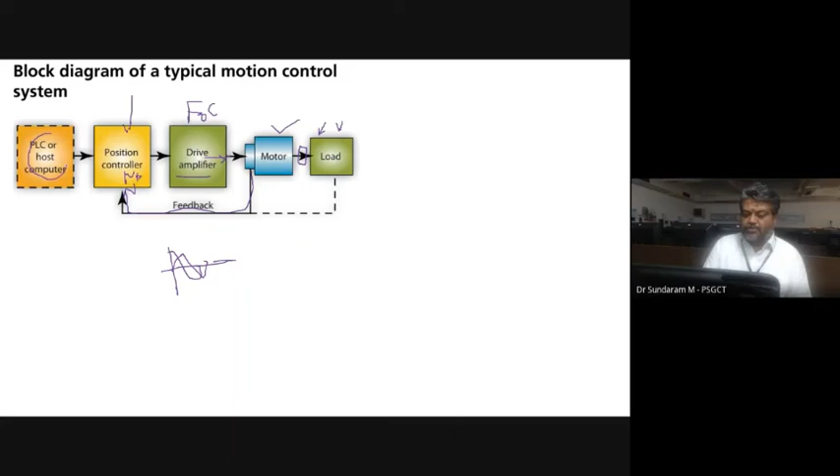So from here, mostly in automation, control is happening from PLC or PC-based automation, or sometimes people will use this kind of platform, API, application program. It may be running in HMI, or in your PC, or in some kind of iPad, Android or something else. So from here, they will generate a clock pulse, and pulses will be given as output. Why? There are a few input systems you should know.

First, analog input, AI, right? In analog input, we will give 0 to 5 volt as a command. So if you have a potentiometer, you turn this potentiometer, so 0 to 5 volt will go to your microcontroller. This 5 volt will be converted into minimum 16 bit, like this, 0111, which is called 2 bytes. 8 bit equals 1 byte. So 2 bytes are going to be a word, 16 bit. That's why it is called a control word, right? So you can give analog input, or you can give binary input.

That means your drive has 2 binary inputs. For example, 00, 01, 10, 11. So 4 possible speeds are possible with this kind. So you can choose 00. Both switches are off. Just connect a toggle switch. Both are open, 00. Then you can program, say it should run at 500 RPM. If you close only one switch, 01, it may run at 750 RPM. Like that, 4 programmable speeds can be done, where you cannot do continuous speed, but 4 programmable speeds.

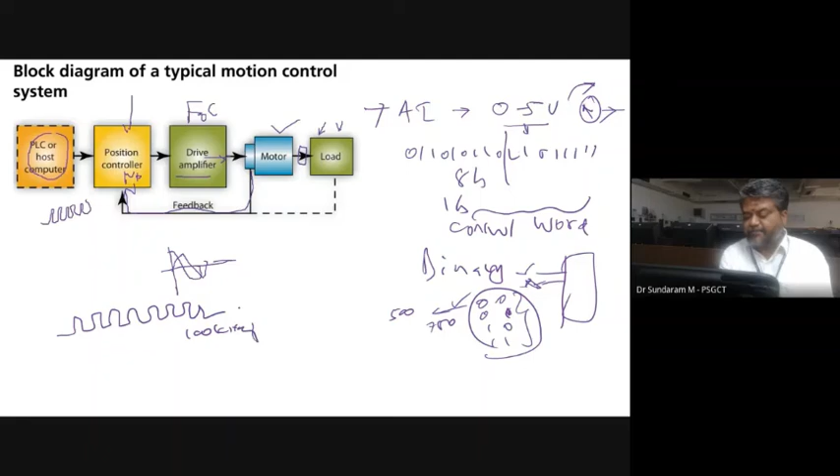There are some machines where you want to operate at 4 programmable speeds. Then another one is PTO, pulse train output. This is the mostly used one, pulse train output. Say it will be 100 kilohertz pulse maximum. From the PLC, this kind of pulse train will come to your microprocessor as a command. This will be generated in your HMI. Say I am giving 1000 RPM and I am entering.

If you go for a CNC machine, they will write, say, G97, X100, Y200, F100.5. It is a program, a G code program. So simultaneous control: X-axis should move 100 mm, Y-axis should move 200 mm at a feed rate of 100 mm per second. This is the meaning of this program line.

If you execute this program, then your compiler will convert this G code, M code, S code, T code into bits. These bits will again be converted into pulses. These pulses are connected to my processor's high speed input through a twisted pair cable. We already discussed, because external noise should not damage this pulse, you should provide immunity. So this is about the typical block diagram.

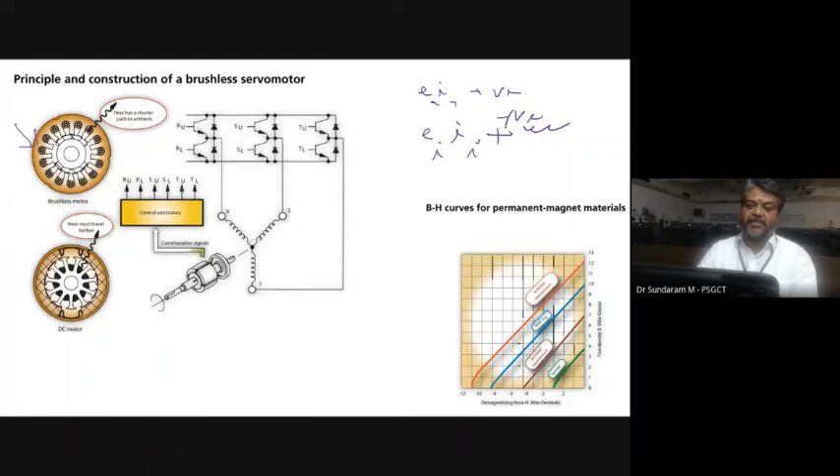And of course, you can see electronic commutation of the BLDC machine. Most of you know that. I want to energize the particular phase which has a positive back EMF. If you inject a positive current, then you get positive torque. Suppose E is negative, then you should inject negative I so that it will give positive torque. Like that, you have 6 pulse combinations, or you can go with FOC. I'm not getting into those things. It is about the brushless drive

or PMSM, sinusoidal drive. In sinusoidal drive, you know FOC, field oriented control. Whatever you have is 3-phase. 3-phase is converted into 2-phase, alpha, beta. And with respect to the rotor, if you convert again, you get D and Q. Using D and Q, you are separating the flux component and torque component. Of course, you know this.

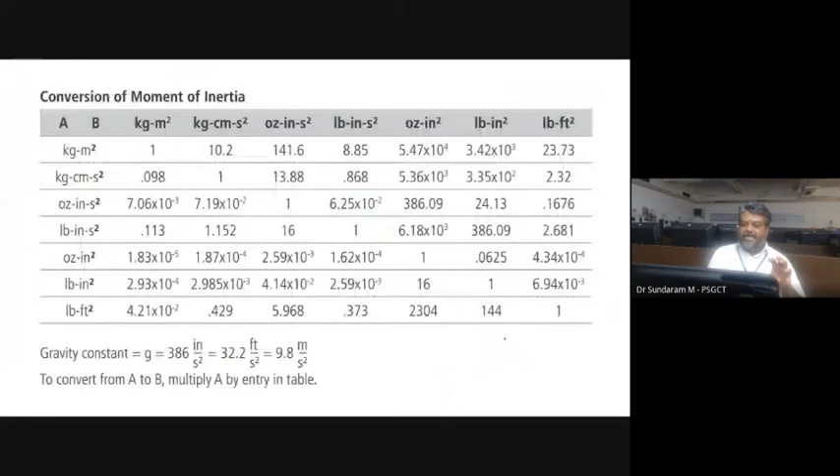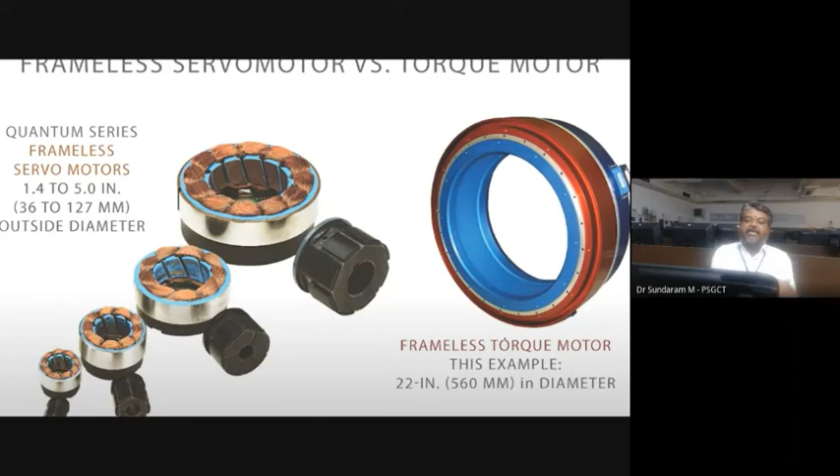Now people are thinking that the electrical machine is obsolete, but there is a period where you can do a lot of work on machines. The only thing is, we need manufacturing support. We still have a huge gap in making these kinds of motors. But all are getting into automation, all the applications.